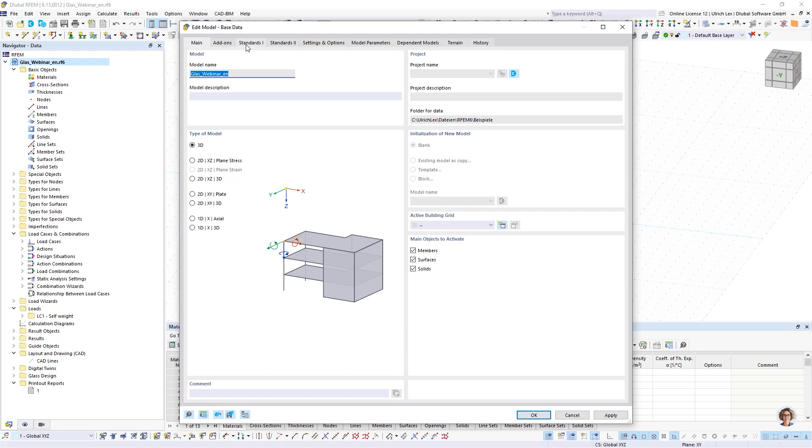I want to switch to the program now. As always, we start with a new, empty file that I created here. Let me show you the base data - all things are default settings.

What we need today is the add-on glass design. We have to check it on to get these items for glass in RFEM itself. As a second part, we have to choose the standard. For glass design, it's possible to use DIN 18008, the American standard ASTM, or a design check and stress check without any standard.

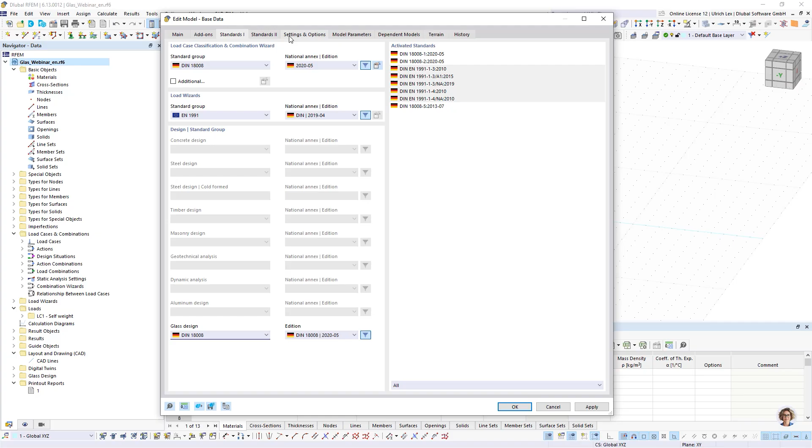Today I want to use DIN 18008, and I have to set this also for the load case classification for the combination wizard, because here the load duration and these things are considered. The rest of the settings are default, so I don't have to explain them in detail, and we can continue with OK.

Now some basic settings we can change for glass. We can change the working plane, maybe in XZ direction when we have vertical glazing, or we can leave it as a horizontal working plane - it's up to you. We can also modify the spacing for the work plane from 1 meter to maybe 10 centimeters.

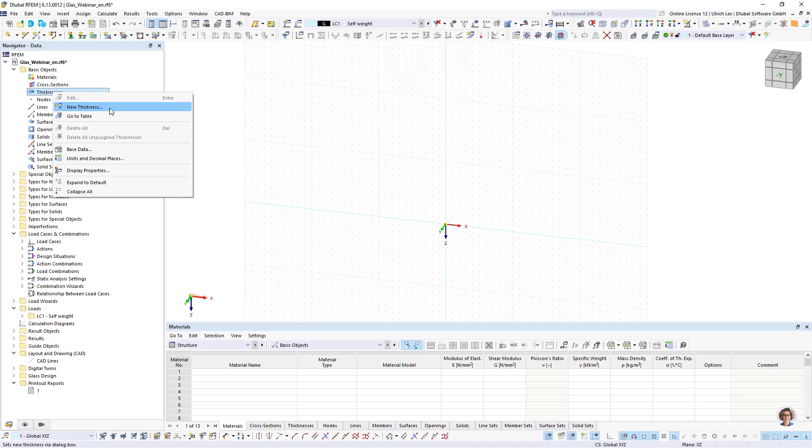So now when we start with glass things, we can use all the usual RFEM functions. I can start with the thickness - each surface has to have a thickness. That's why I can create a new thickness.

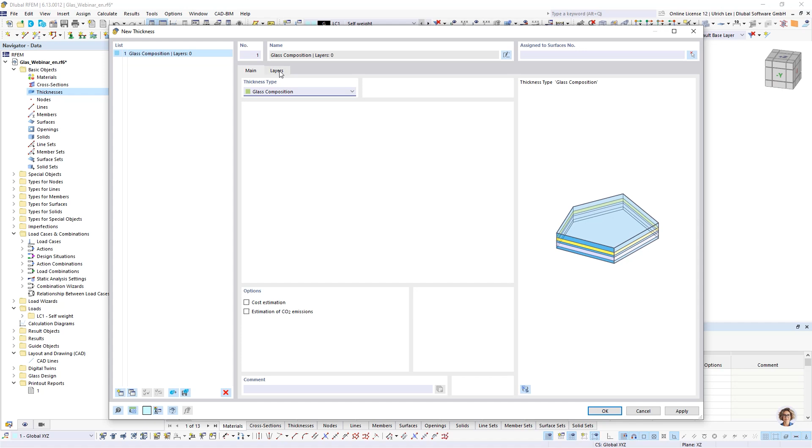If we check our glass add-on on, then we get a new thickness type called glass composition. When I choose this glass composition, I get a new tab of layers, where I can type in all my layers, or the glass composition I want to have.

That's what I want to do now. I create a new material, choosing a material from the database. Here I can choose glass - maybe for today, float glass - with a thickness of 4 millimeters. I can create a new material for the foil.

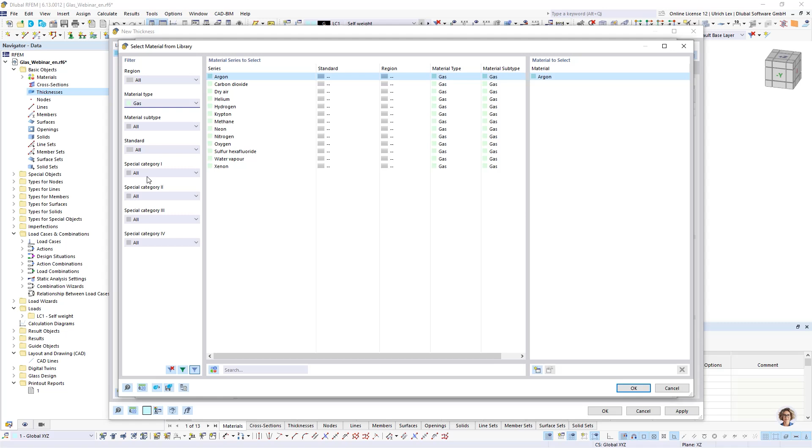Again using the material library, I want to use PVB. I can create here a new material for later, for a gas layer. Here I can choose maybe dry air or argon - it's up to you what you want to use here.

As a second layer, I want to have the PVB, and as a third layer, I want to use float glass - 1.52 millimeters thickness, and then 4 millimeters.

Before I continue with the insulating glass unit, I want to show you two other examples as a laminated glass, only to show you the difference in what the program does when we choose surface design or solid design.

So I want to start with the easiest one, creating a surface with a laminated composition.

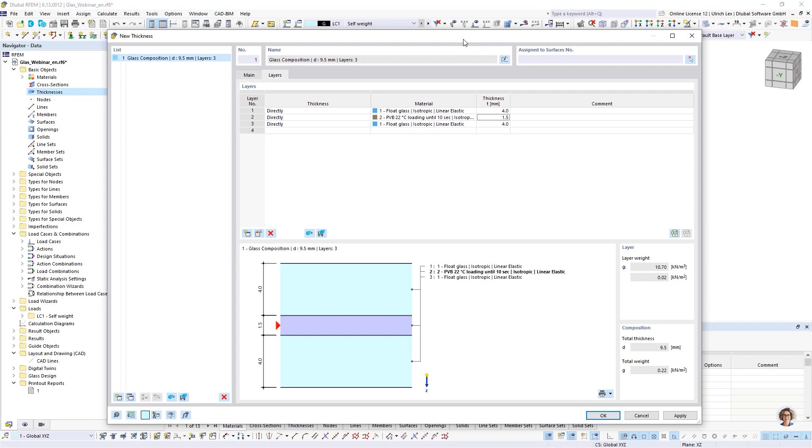So my composition is built up. Here I also have the total weight of this composition, so I don't have to compute it manually - it's considered with the self weight. I can continue with OK.

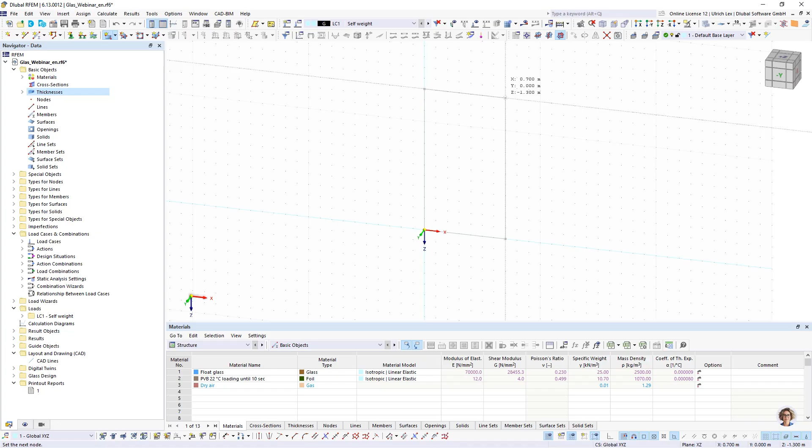Now I can create my surface. When I create a new surface, I can choose my thickness with my glass composition and create this surface - maybe 1.3 meters and 70 centimeters width.

So that's all I have to do. Now I have to continue with the supporting.

As a support, I want to choose now a line support. It's acting in global Y direction. So I create a new line support for horizontal loads.

It's acting in Y direction. Here it would also be possible to use the local coordinate system. For glass structures, it's maybe common to not use a really fixed support. Therefore, you can also use a spring constant.

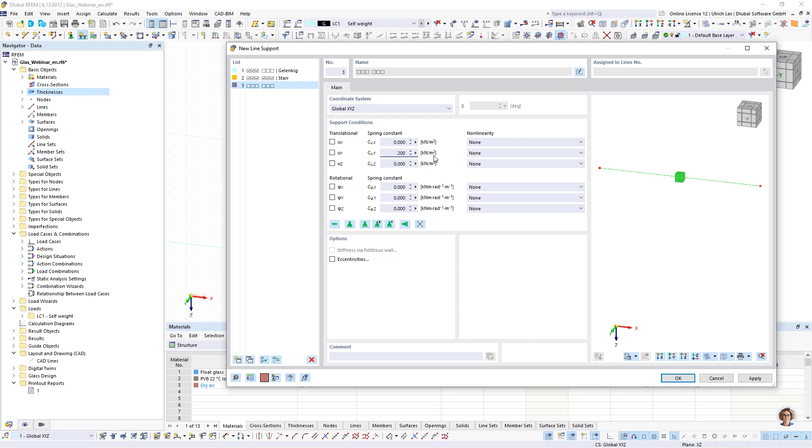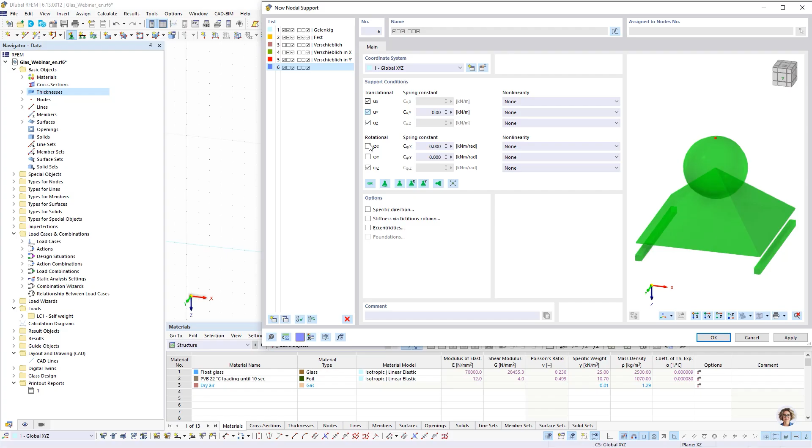Okay, and choose the lines. As a vertical support, I choose now here a node support. It's fixed in X and Z direction on this side, and it's fixed only in Z direction on the other side.

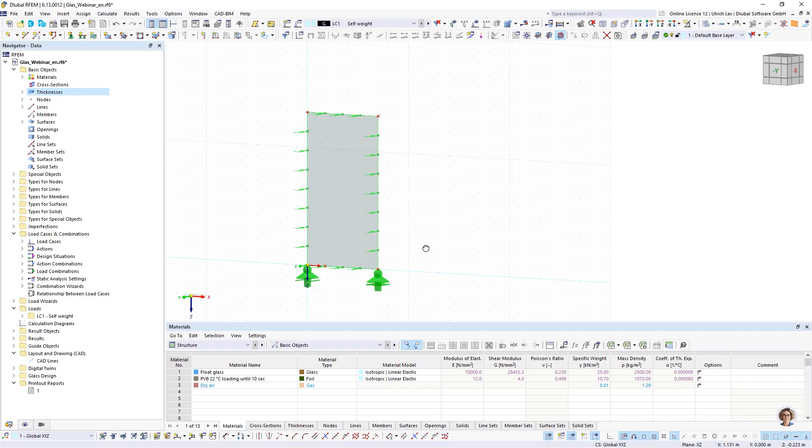Okay, so now my glass surface is created completely. So when we now create a surface with a thickness of type glass composition, then we get here, downside at the glass design topics, this glass composition model. Here a new glass composition model is created automatically.

Because of this thickness type glass composition, the program tries to create for each surface with the same geometry and same thicknesses only one glass composition model. If you have different thicknesses or different geometries, then for each surface a separate glass composition model is created. So I can open this dialog with a double click.

And I see this glass composition model is assigned to my surface number 1. And here, with this glass composition model, I have additional settings I can use, especially for our glass design.

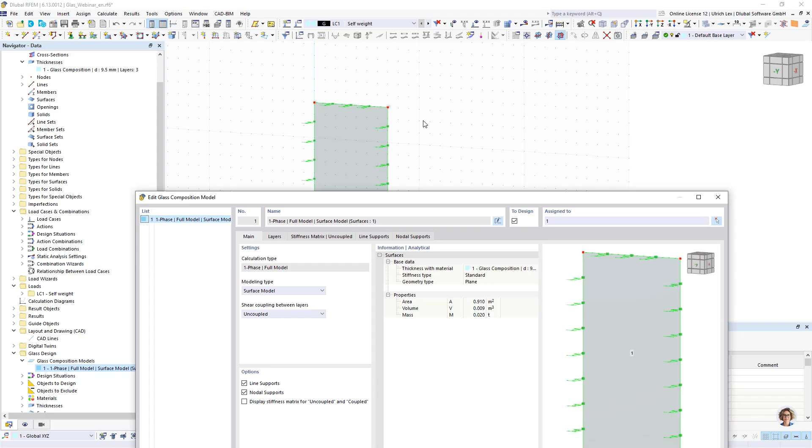So the modeling type I want to choose for the first example is this surface model. This surface model is possible for laminated glass, meaning that my glass composition is created as a surface. So it's computed with this stiffness matrix, shown here in the third tab.

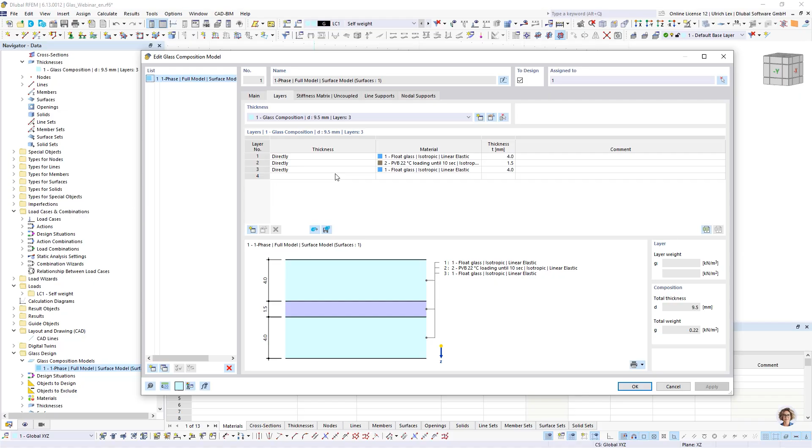At the second tab, I only see my thickness again, it's just info about what thickness and what layers are assigned. Here I get information about the assigned line supports and nodal supports. I do not have to change anything here, so I can continue with OK on this place.

So this is for a surface model and laminated glass. Now I want to define the loading.

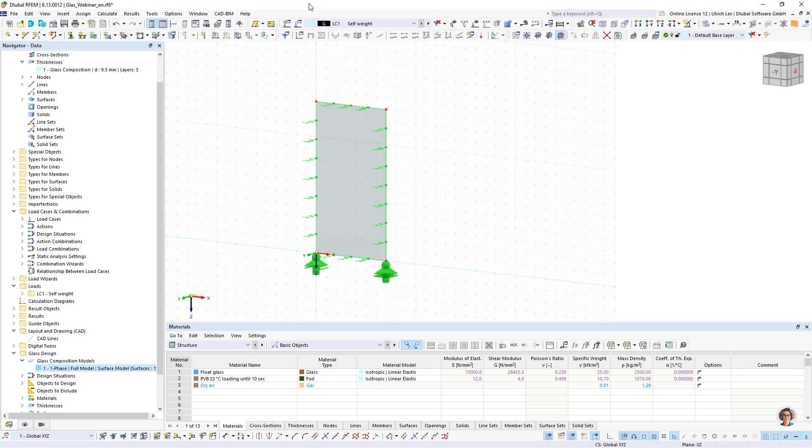Here I want to create a new load case, maybe as a wind loading. And create a surface load. It's acting in Y direction, maybe 0.8, and I want to assign it to this surface. Okay.

Now the loading is created and I could continue with calculation of the system and run also the glass design.

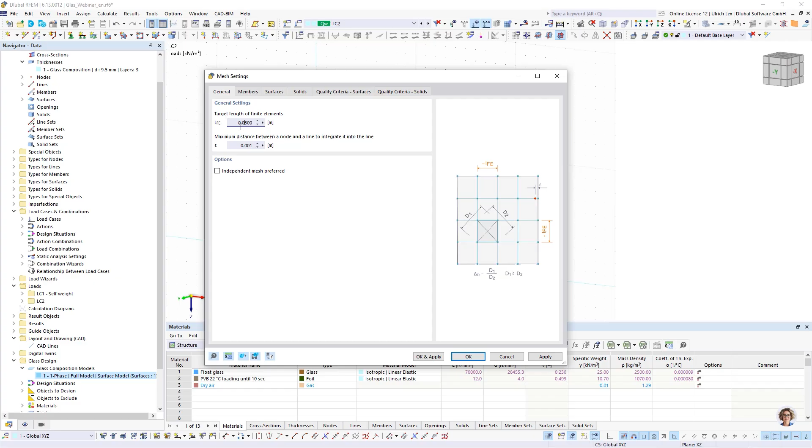One point I can take a look at is the FE mesh. Here it's by default a setting of 0.5 meters. It's too rough for glass structures. I would recommend 0.1 meters or 0.05 meters, it's more exact. So I can change it here.

Okay, so before I start with the calculation, I want to create the second option where I want to show you the solid type. So what can I do for the solid type?

I create a new thickness to show you the things with a second glass composition model. I create again glass composition layers, float glass and float glass, the same settings as before, 4 millimeters. So if you always have the same composition, you could also save this composition as a template and load this template again and again for your user-defined compositions. So I can continue with OK.

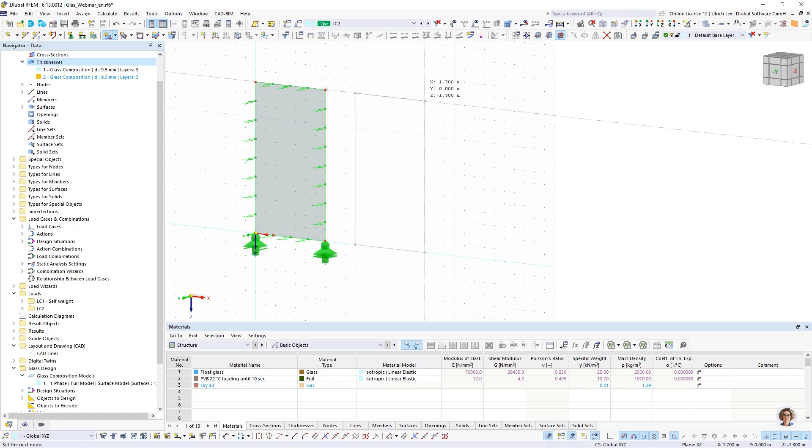I can create this new surface now with thickness 2. OK. And create here the same structure as before. I want to use the same supports.

This one apply, and here the second one, and the line support on this line. Okay.

Also the loading, I want to assign it on this surface too.

So now a second glass composition model was created because we have a different thickness used. So when I open this glass composition model, I want now to change the modeling type from a surface model to a solid model.

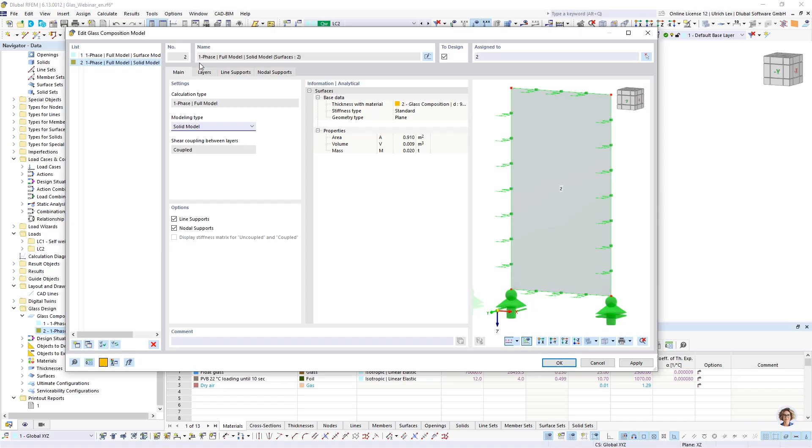So for a solid model, again I have these layers as information. And additionally to only the information, I now get the option to set a reference plane. The reference plane tells me in which direction my solid construction is created. So now the reference plane is set on the top of layer 1, and I can change it maybe to the bottom of layer 3.

Or I can change it to the middle, it's up to you. But we have to know that this reference plane says in which direction the composition is created, and as a second thing, the loading is currently acting at this reference plane. So I'll show you how we can modify this afterwards, but as a first step we have to know this.

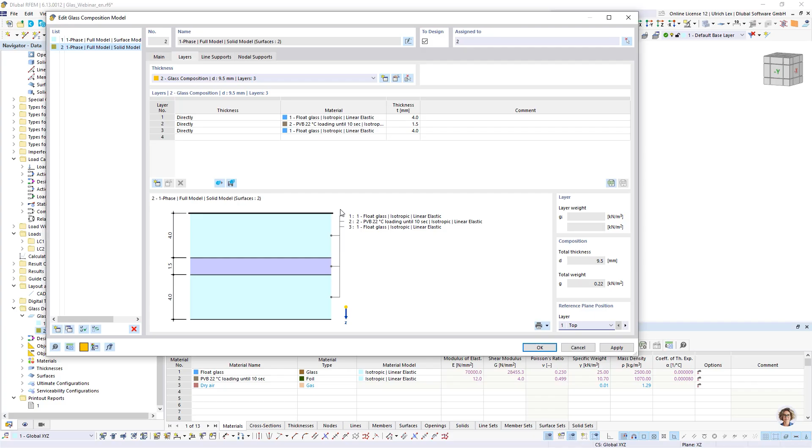So we again have here the line supports and the nodal supports. If we change here nothing, then the line supports and nodal supports are acting also on the reference plane. Maybe we can modify it here a little bit. The line supports maybe are okay, and for the nodal supports I can say these nodal supports are acting on layer 1 and 3, maybe in the middle.

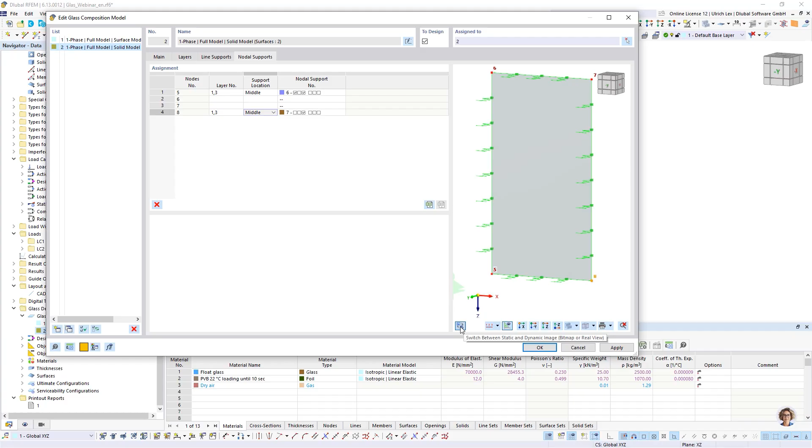So what does this mean? We have here an item where we can switch between an image and the structure. That means my supports are now acting in the middle of layer 1 and 3, or I can change it to the top, and so on.

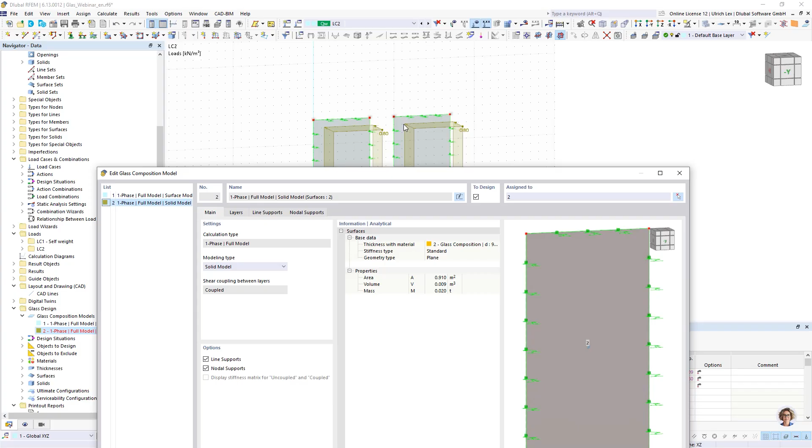So when we now click continue with OK, then we can take a look what is happening in RFEM itself. In RFEM, this glass composition model is red again because it could happen that the line orientations or the surface orientation is not exactly what the program needs. So we have to click OK or continue, and click continue with OK, and get this message that the program needs different line orientations.

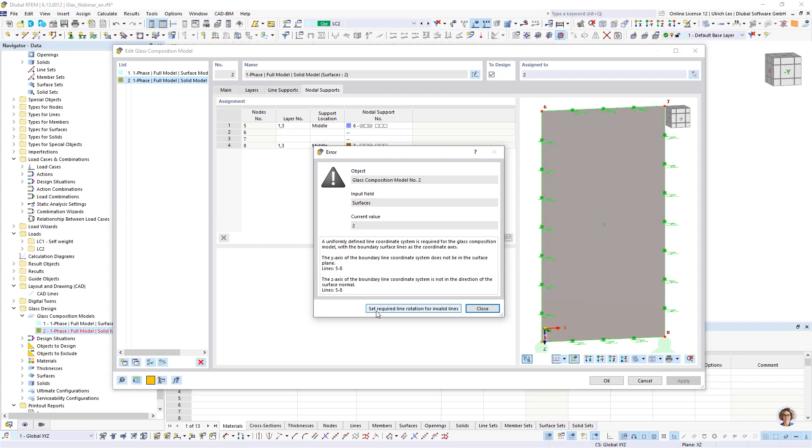We can here easily continue with set required line rotations. Then my glass composition model is okay.

If you create your glass surface in the horizontal plane XY, then it's okay from beginning. It's only when we use a different working plane that we have to modify the line orientation.

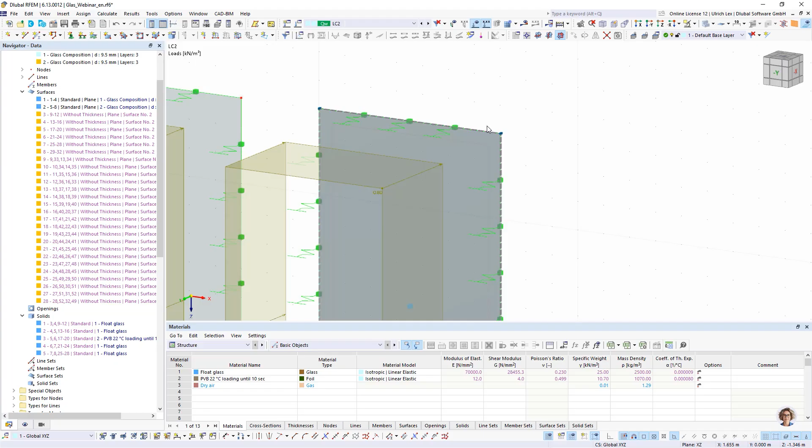So what is happening now? The program creates additional solids in the background, and also surfaces. These colored surfaces and solids are created from our glass composition model. We can display also this structure if we use this button — I call it always this magic button, display glass composition model. When we take this on, then we see that the program creates our composition as a solid.

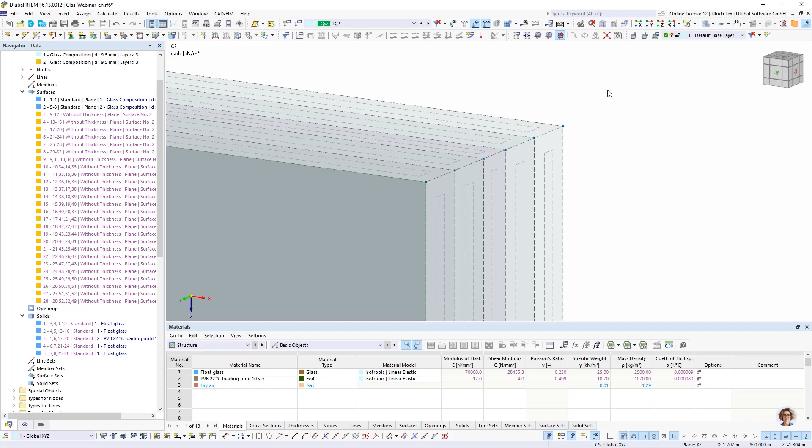There were created two solids for the first glass pane, my PVB solid, and two solids for the second glass pane. They are created as two solids because we set one support in the middle line. If you set the support on the inner or outer line, then only one solid is created. It's only a technical issue, but you have nothing to do with these automatically created surfaces and solids. Exactly, this is the difference between the surface modeling or the surface type and the solid type.

Okay, now we are at this state. We can continue with the insulating glass.

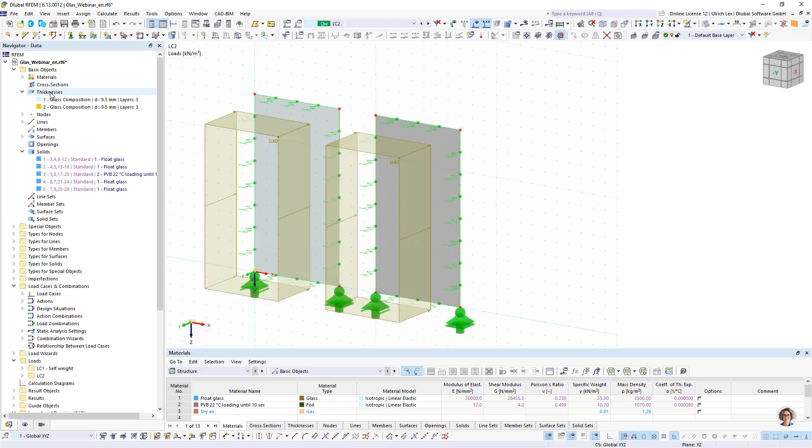For the insulating glass, I want to do the same. I can create only a thickness, a new thickness for my insulating glass pane. So I want to use glass composition, choose my layers, say okay. As a first, I want to have float glass, maybe PVB. I have to set the thickness of the float glass.

Now I only have to set here my gas layer, 16 millimeters, and as a second side I can use again my float glass. So it's not limited — we can also create here a triple insulating glass and so on.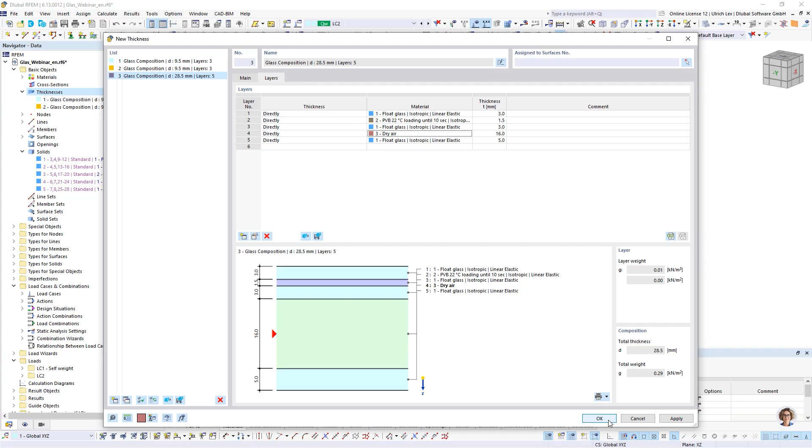If you assign here a gas layer, then you see the composition is displayed correctly with the gas layer, and also the total weight is considered automatically. So this is everything we have to define also for the insulating glass, and we can continue with OK.

Again, I create a new surface to show the difference, using now my insulating glass thickness, and create the same surface. It's also possible to maybe set the supporting node on the edge.

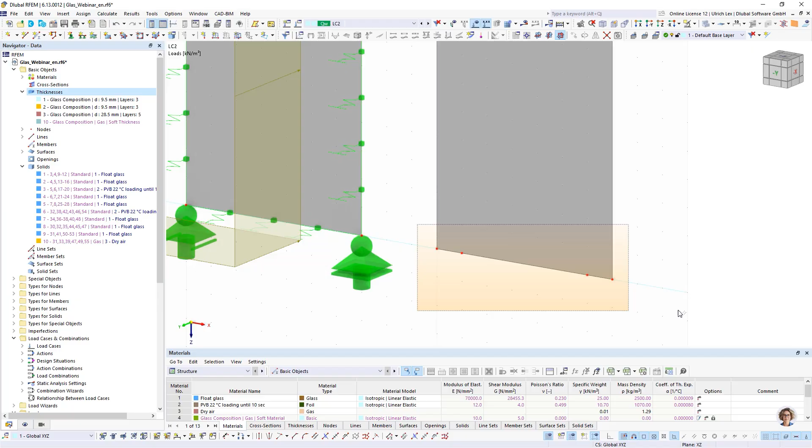Therefore, I created here new nodes. I have to connect these nodes with the lines, and can set here again my nodal supports, on the one side and the other side.

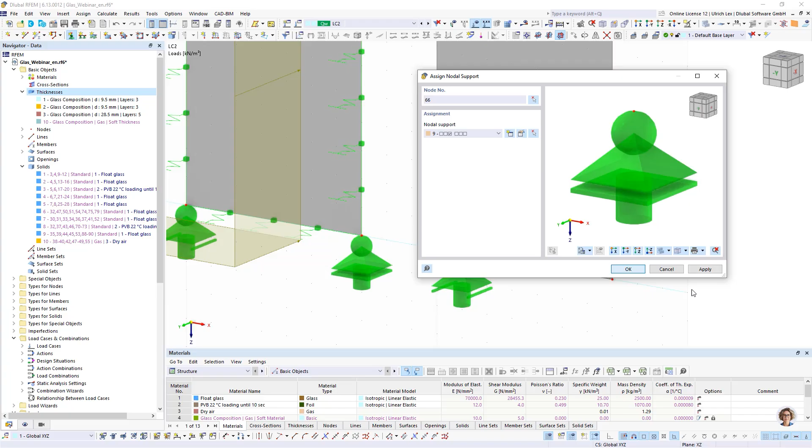Okay, and the same for the line support, and click with OK.

As a loading for wind loading, I want to use also the same as for the other. Additionally, I want to create a new load case, maybe an imposed load, where I want to set a line load — maybe use this new free line load. It should act in the XZ plane, in direction Y.

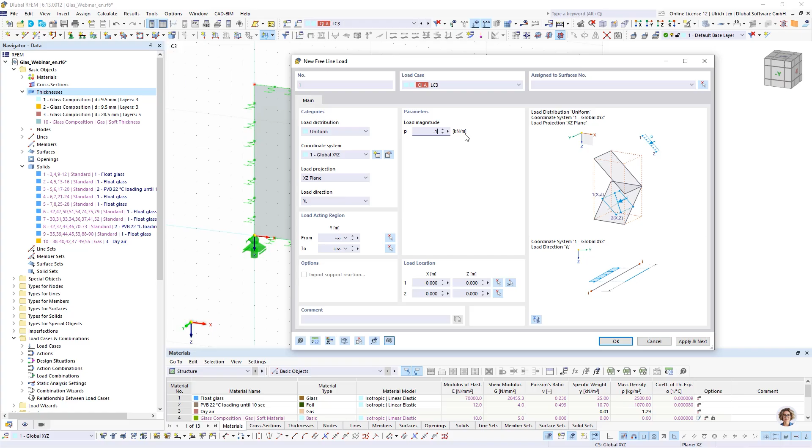For example, here, and assign it to this surface.

Okay, I want to change the direction. Okay, this I want to use as an additional load case.

So now we see again a new glass composition model is created. When I double click, then I can open it. Here is now the modeling type — only the modeling type solid model is possible. I get here as options a few more options for insulating glass unit, and additionally for climatic loads, summer and winter.

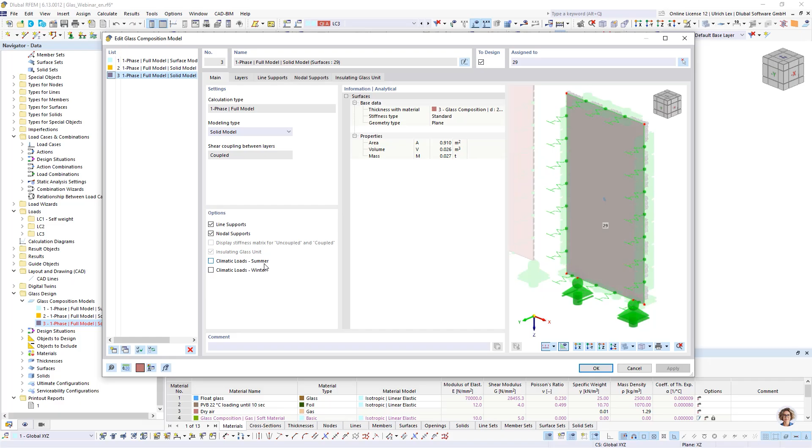So when we take a look at the separate tabs, I have again these layers with my reference plane. I do not want to change it. I can set my line supports. My line supports I want to modify now — maybe I want to set this line support on layer 1 and layer 5. So I can choose it here, layer 1 and 5 in the middle, and the middle, 1 and 5 in the middle.

I have to set it in the middle. So I press Apply once. I get my message to change this line orientation. I can continue with OK.

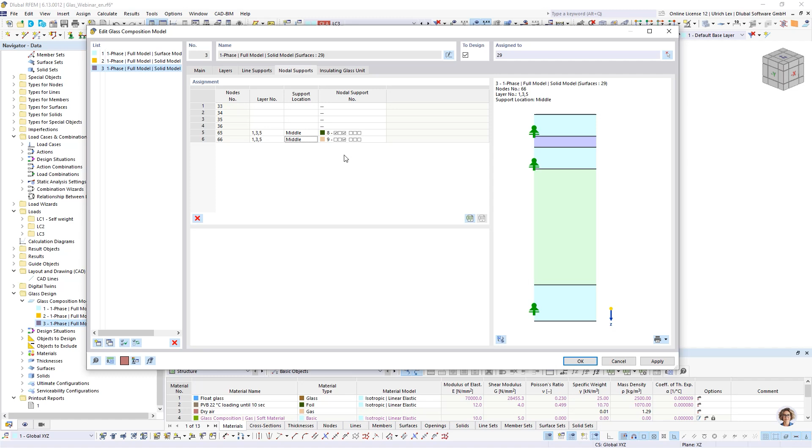I can continue here with nodal supports. For the nodal supports, I want to set this on each glass layer. This way, I don't get problems with self-weight maybe. Here I could also use some non-linearities, maybe when I want to have that it's a failure if tension is in the support. But for this example, it's okay when we define it in this way.

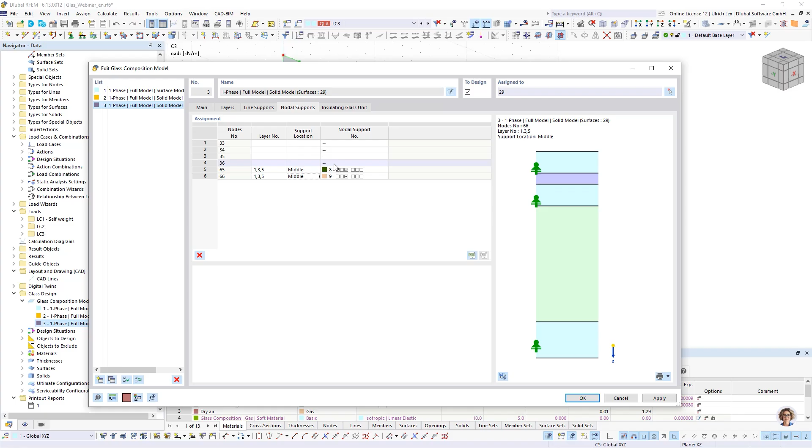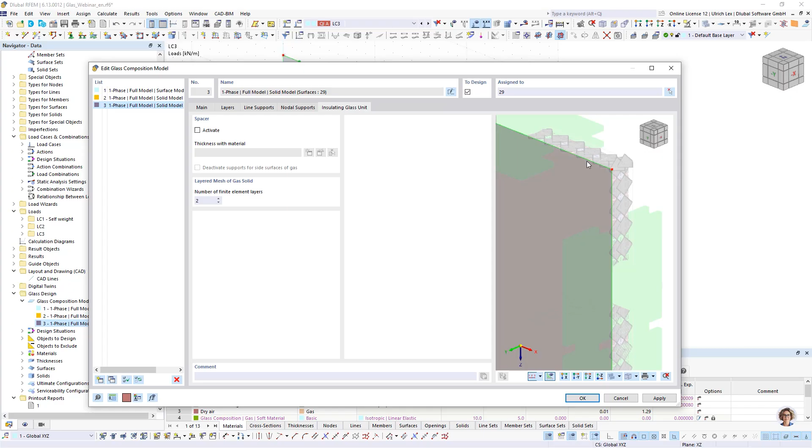So as an insulating glass here, we would have the option to change the settings for the spacer. I would say we can modify the thickness of this side surface of the solid, and also we could deactivate these helper supports we use for this gas solid. But in our case, I do not want to change something here. So I can continue with OK.

At the first step, we see nothing. Again, a lot of new solids are created automatically, and a lot of surfaces are created automatically, but we have nothing to do with this.

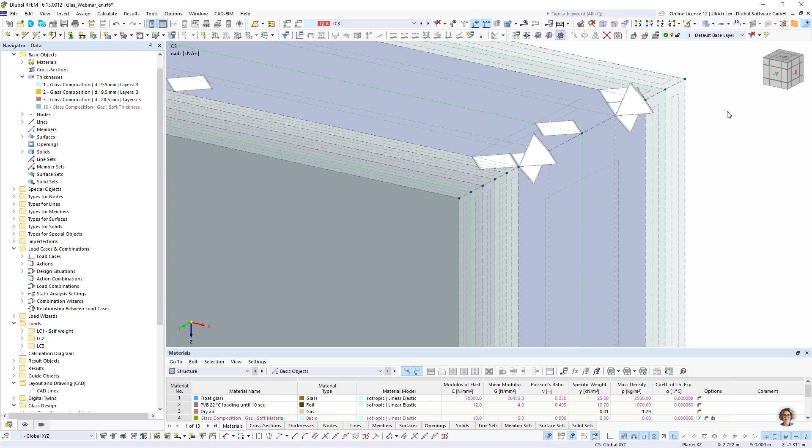We can again take a look at this glass composition model. I can modify the size of the hinges, and also for these supports. So what we now see is that the program, this glass composition model, creates our composition with solids in RFEM.

Okay, one step I forgot, so I have to go back to the glass composition model. This is the climatic loads for summer and winter. If we have an insulating glass unit, it's usual to consider these climatic loads. So we can check on both items.

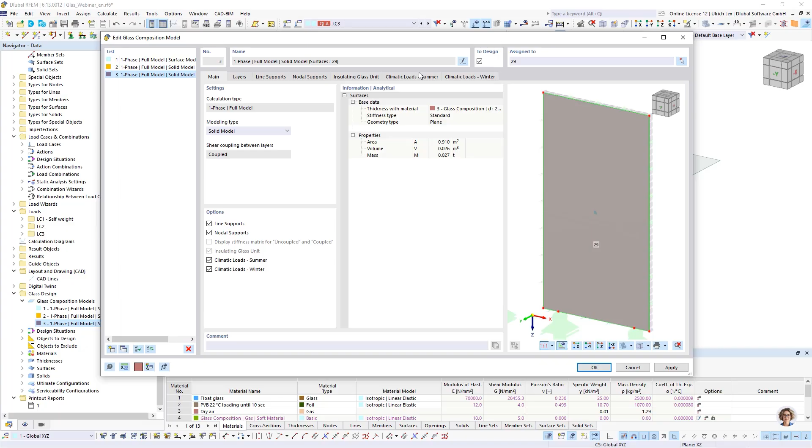We get this new tab for climatic loads. Here for these climatic loads, I can use the input as specific values according to the standard, or I only can use these differences to set the values directly. Here I had to create a new load case for the height difference. If I do it here from this tab, then I get the setting automatically.

It's a summer situation, so it will not be combined afterwards with the winter situation. I can continue with OK. And the same for temperature differences and atmospheric pressure differences.

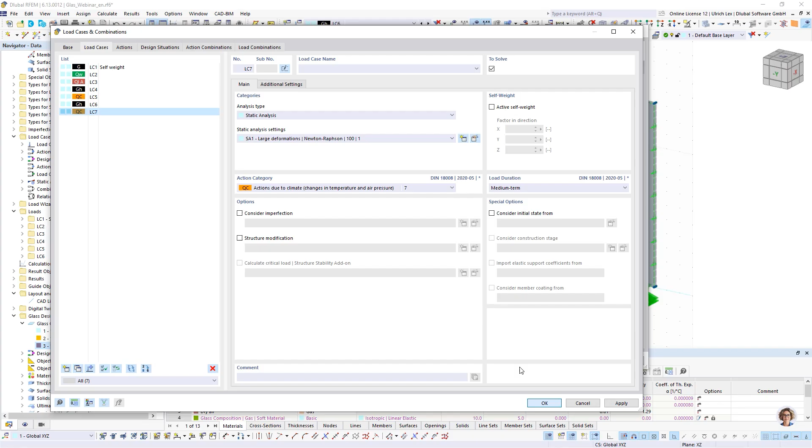Here I want to use load case 5. My settings are according to standard, so I leave them as they are. The same for winter: I create a new load case for winter. Again, this height difference is load case 6, with the additional setting for winter. And the same for temperature and atmospheric pressure.

So that's everything we have to set here in these two tabs. When we continue with OK, we see that the load cases are created, and the loads are created too, acting on the glass, on the insulating glass unit. So it's one time two surface loads, and another time one temperature load and a surface load. The same for the winter situation, for the height difference and the other one.

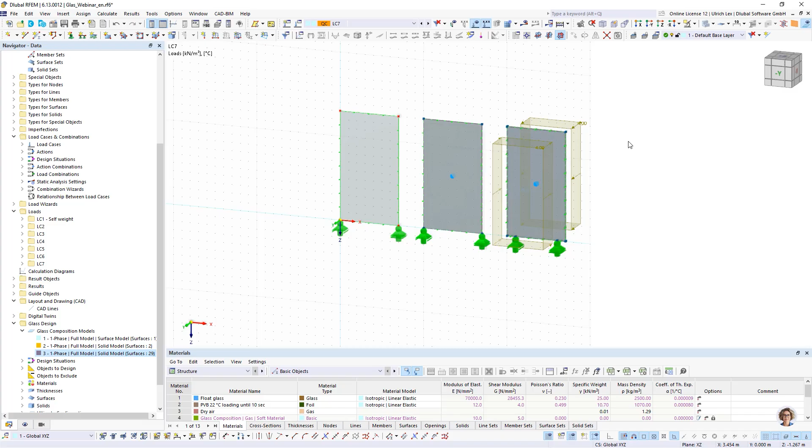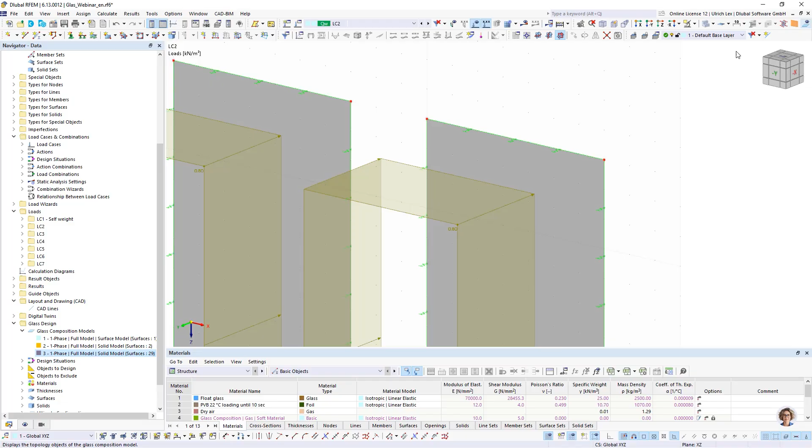So now we are completed with our modeling. One note on the loading for the wind load: as I said, the wind load is now acting on my reference plane. My reference plane is set on layer 1. So my construction is created in the Y direction, and my wind load is now acting here in front of layer 1.

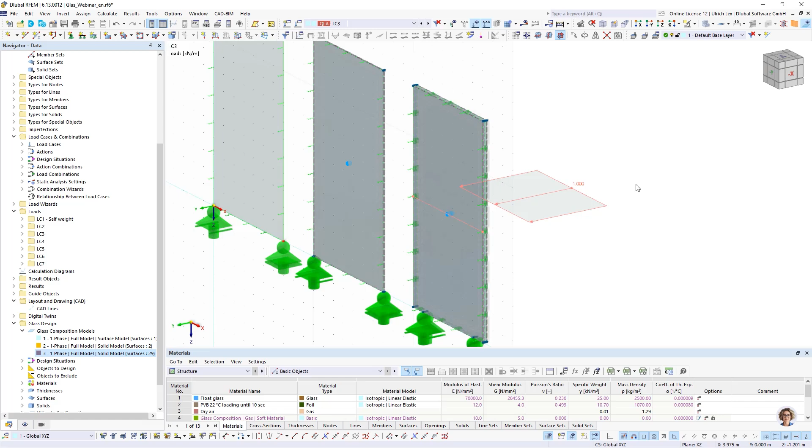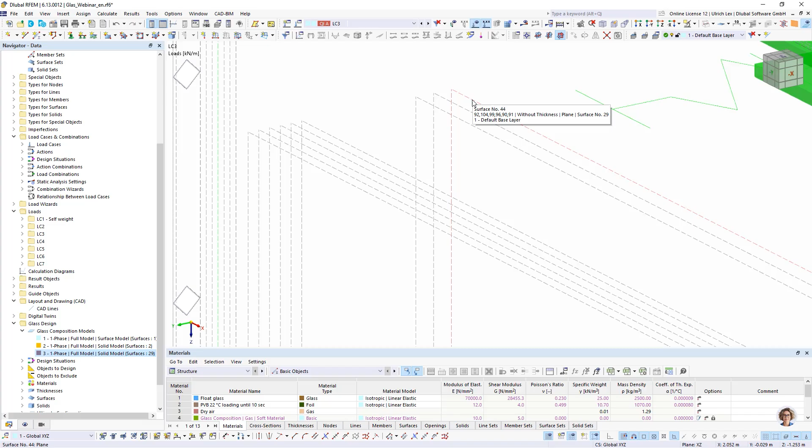This is okay for this example, but my second load should be acting on the opposite, the other side. Currently it's acting on the reference plane too. We can check this if we click into the load; it's assigned to surface number 29. When we take a look at the surfaces, we see that our reference plane is surface number 29, but this load should be acting on the other side, which would be surface number 44.

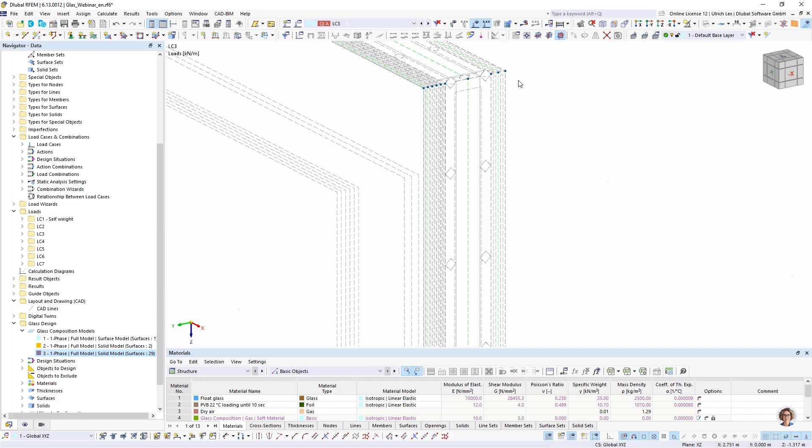So we can easily change this when we open this surface and assign this load to surface number 44. Now the load is acting on layer number 5.

So additionally, we now have all items directly in RFEM. It's thinkable if this glass pane is a little bit different, so that here the width is a little bit bigger than the glass pane in front. It would also be possible to create here an additional glass solid.

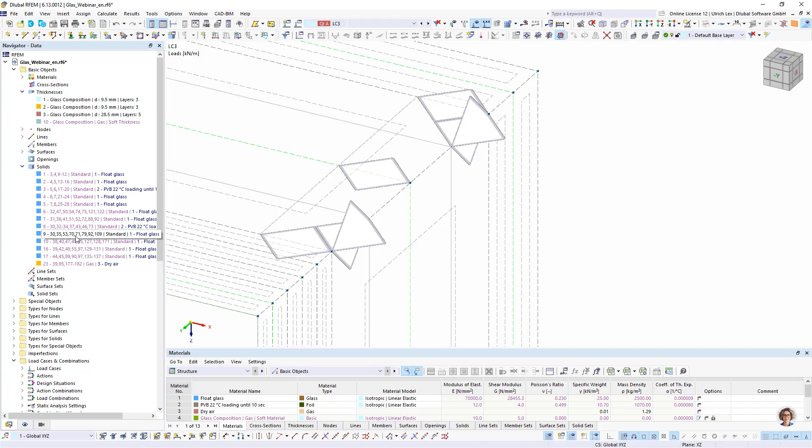And we could also design this additional modeling. It's not possible in all cases, because we have to be sure that our created solids and objects are not destroyed. But in some cases, you could try to do an additional modeling to design some special cases. This would also be possible.

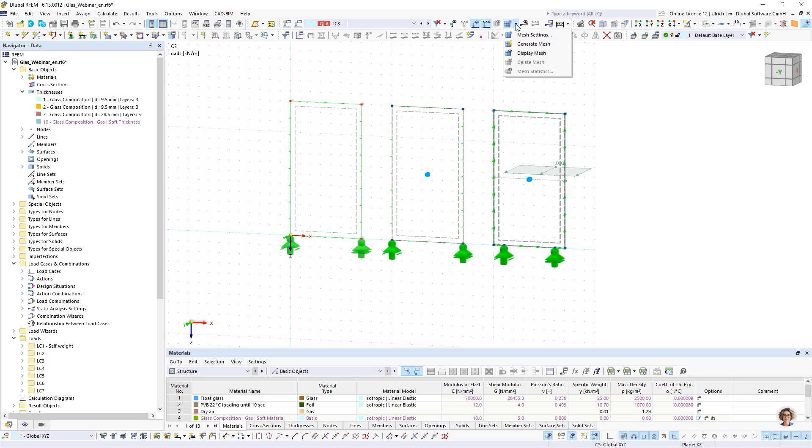Okay, now the modeling is completed. Then we want to create the FE mesh. I want to generate it. Yes, I want to generate it. We see a regular FE mesh, I think it's okay. For these solids, by default there is a mesh refinement. The layered mesh is activated, so that the FE mesh in these solids is quite regular.

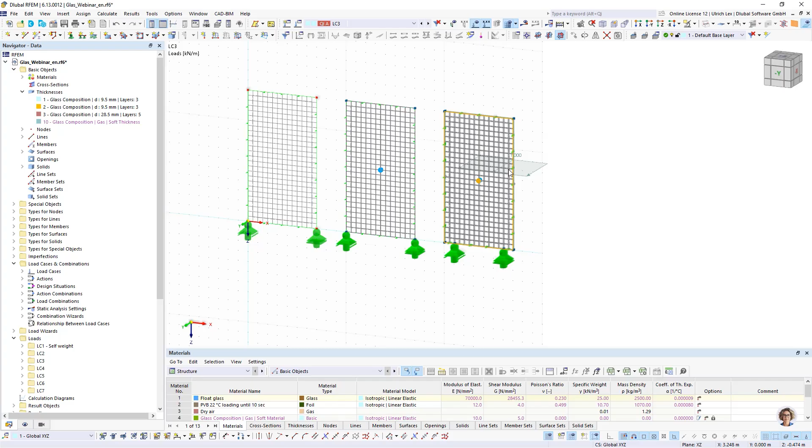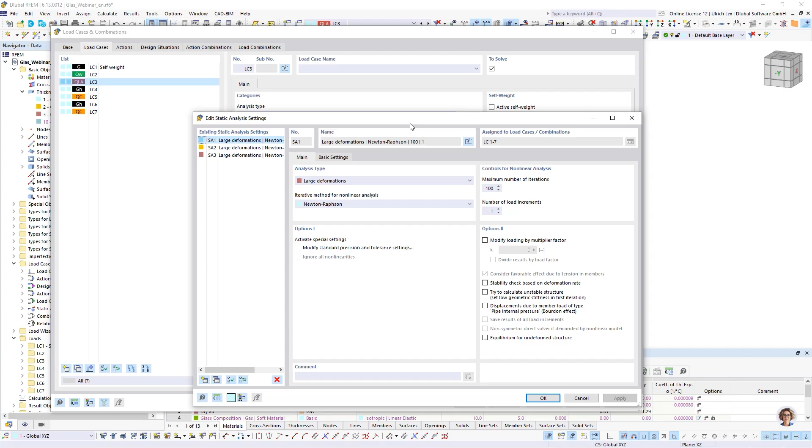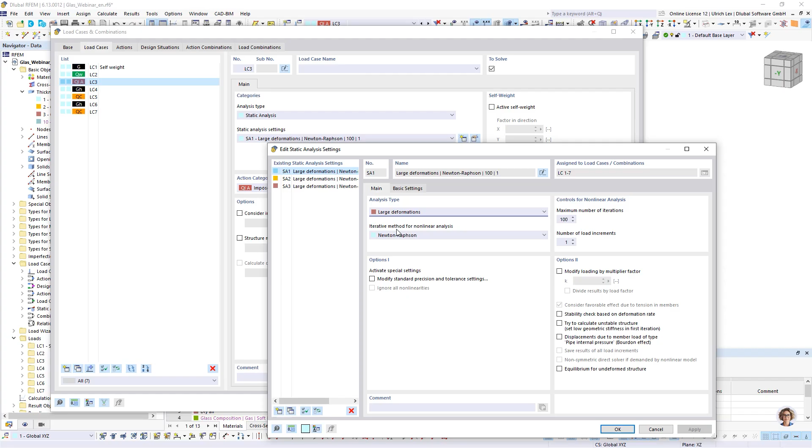So for the next step would be the calculation, the static analyze setting. We can take a look at there. If you use insulating glass or this gas solid, then it's set automatically as a large deformation analyze. And I would recommend this always, also for laminated glass, because only the membrane stiffness is activated for this large deformation. Of course, you could use for some easy cases also calculation of theory first order, but I would recommend always this large deformation analyze.

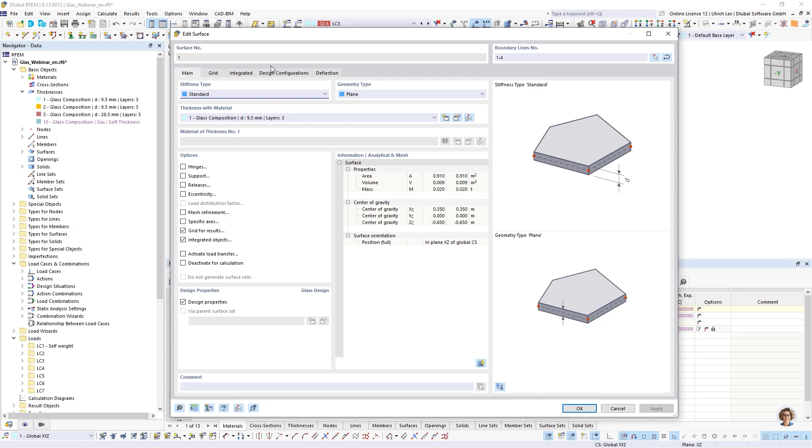Okay, now we can continue with specials of glass design. The glass design settings themselves are in the surface. When we edit a surface, we have here the design properties. They are checked on automatically when a thickness with glass is assigned. Here you can do some design configurations, or you can change these design configurations according to the standard.

You can choose any different settings for surface sets, where you can change also the standard parameters. In the second tab, you can do settings for the deflection analysis. Here the reference length is 0.7. This is okay. Only in the last surface we have to change it, because of minimum border it's 0.1.

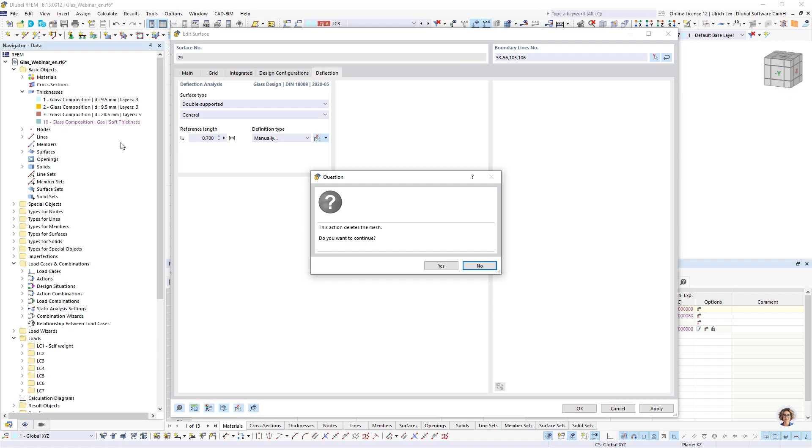Here we have to change it when I choose this length. Okay, this change I always do on my created surface, and when I now take a look at my created solids, maybe the float glass solid, we see that the deflection for this solid is changed automatically, and I do not have the chance to modify here something, because it's always connected to my created surface.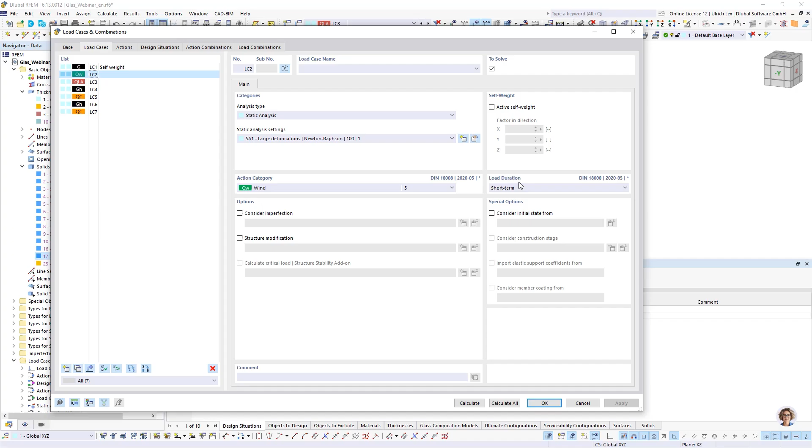Okay, the load case itself, as I said at the beginning, when we use the combination according to DIN, we have here also settings for the load duration. For self-weight, maybe it's permanent. For wind load, it's short term, and so on. This is possible to change manually too. And these settings are again for the load combinations.

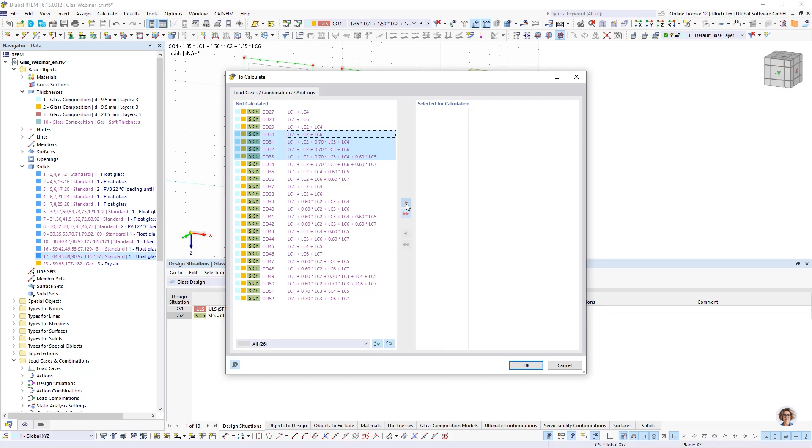Okay. In the glass design, we have here our design situations, what should be computed. Here I have the possibility to compute all load cases, all load combinations, or choose only selected ones. Today I do not want to compute all combinations because of the time, so I select only a few ones, and the same for SLS. I only want to choose a few combinations to compute.

So objects to design, I get here. I can choose what objects should be designed. It's one time this surface, this selected surface. On the other side, my automatically generated solids as surface solid model, because we create only a surface and the solid is created automatically. And it would also be possible to create user-defined solids and to design them here too.

So I have some objects to exclude, so I choose, as I did here, only some load combinations, and here I get all the other information. So here I get an overview. For the overview, I get some errors, I would say. Maybe solid 23 is not designable. When we take a look at solid 23, then we see why it is not designable, because it's my gas solid. And the same is for the other.

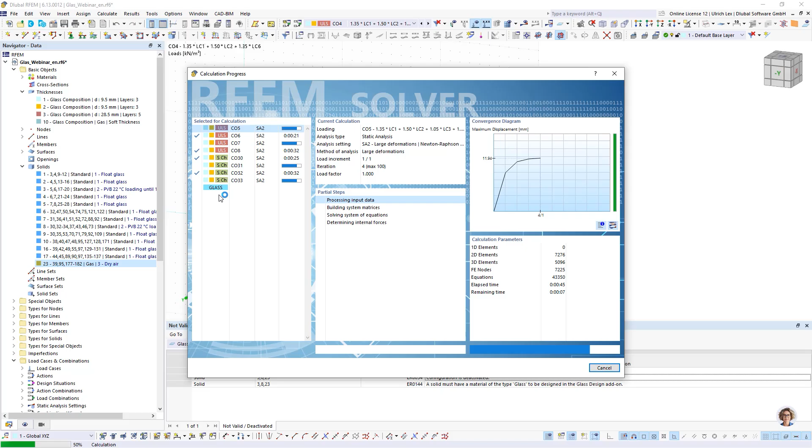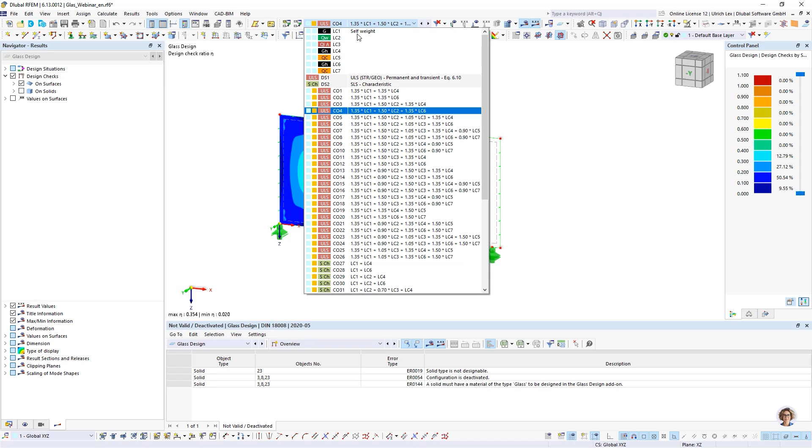Okay, when the calculation is finished, then we get I would say two results. On the one side we get the results for the glass design, and on the other side we get the results for the static analysis.

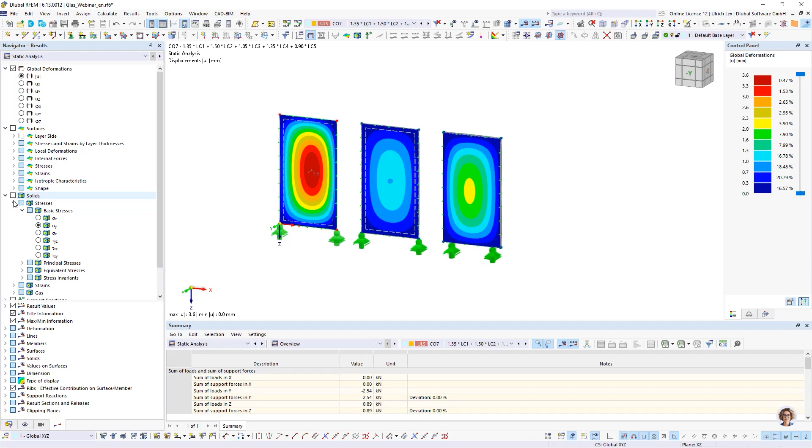When we take a look on the results for static analysis, then here we get all the things like deformations, the stresses for the surfaces, and the stresses for the solids. Also the results for the gas, the pressure inside the gas, and so on. I can take a look on the support reactions and everything included in the static analysis results.

For the glass design results, we get the ratios on surfaces and solids graphically, and we can also activate the values on surfaces, also for grid points or for the mesh points.

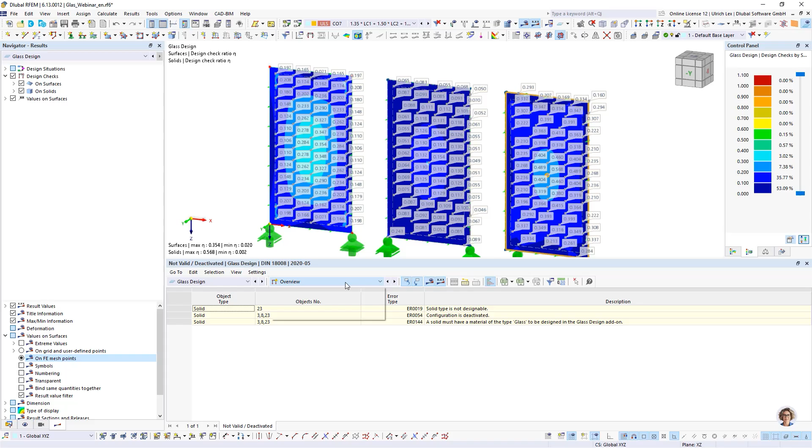In the result table, we get the design ratio for the different situations. On the one side, the design ratios on surfaces, and the design ratios on the solid model.

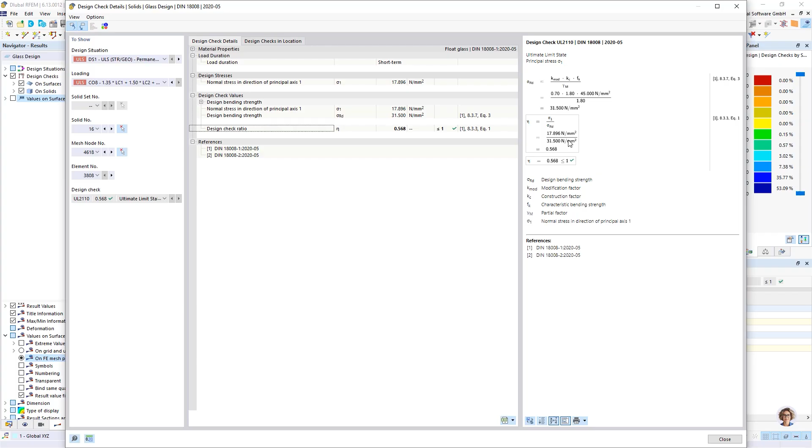So if you double click on this design ratio check, we get detailed information about this check. We get the information on which formula of the standard is used, and we got exactly the values for this design check.

Okay, the same for surfaces. We can take a look on a diagram at the surface point. Here we can take a look at the stresses through the thickness and check all the things. These things can also be printed to the printout report.

The printout report itself can be created in the data navigator, when we create here a new printout report.

When I open my created one, then we see that there are a lot of results in form of a table.

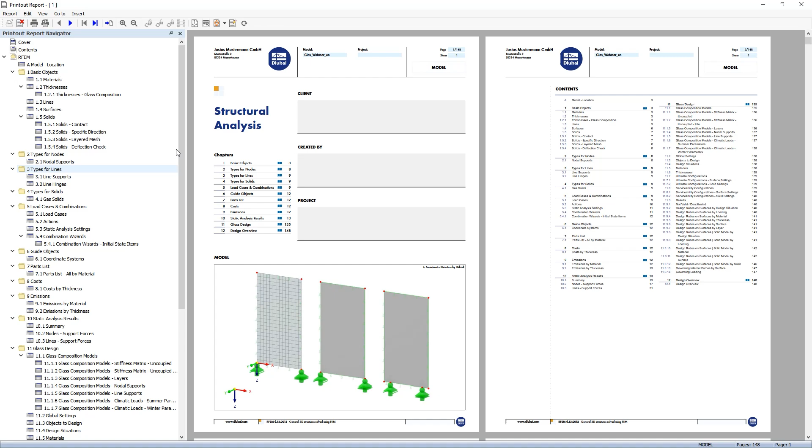These things we can modify user defined when we optimize this printout. When we open this printout report manager, here we can check off all the items what we want to see in the printout report, as table results.

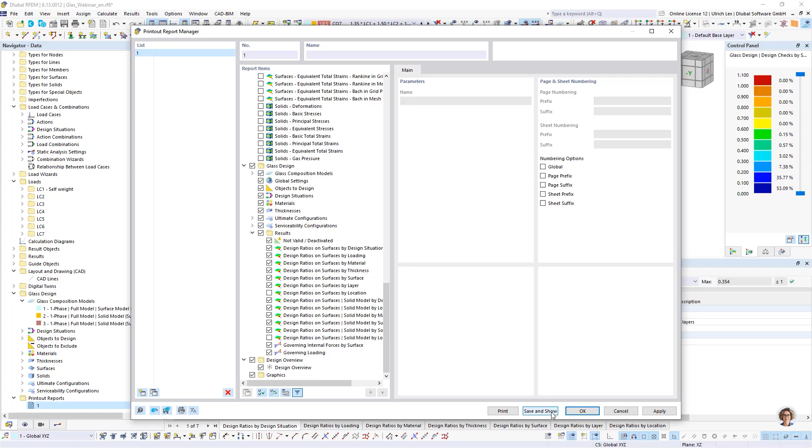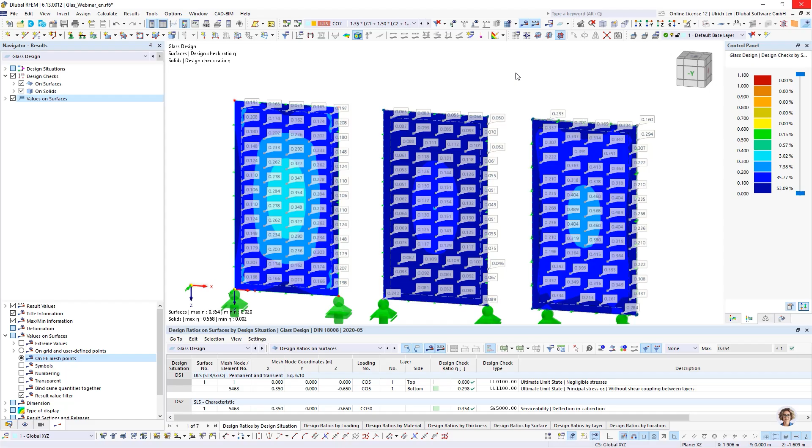And the most important thing for me, I would say, is to get some graphical results. Here it is possible to select one surface and print this picture directly to the printout report.

If we do this, we got a lot of settings to create the page. We can save and show.

The printout report is open again, and this picture is printed to the printout report. So this can be moved also, to a different place. So it's up to you.